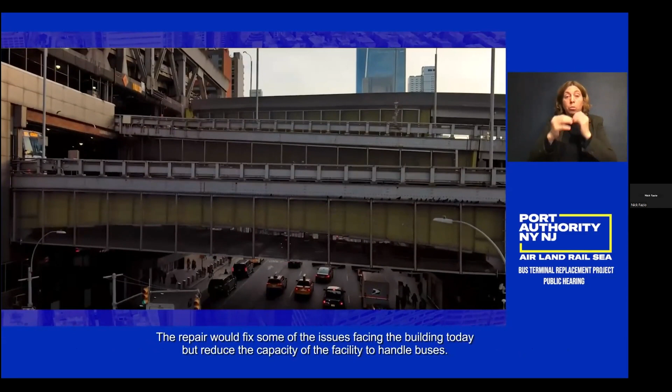The Port Authority needs to support the projected growth of commuter and intercity travel crossing the Hudson, and address the functional and physical obsolescence of the existing terminal. The existing bus terminal is already at capacity and will not be able to meet future demand. It is also past the end of its useful life and will require significant structural repair if a replacement project is not undertaken. The repair would fix some of the issues facing the building today, but reduce the capacity of the facility to handle buses. The Port Authority needs to address bus operations and storage and staging.

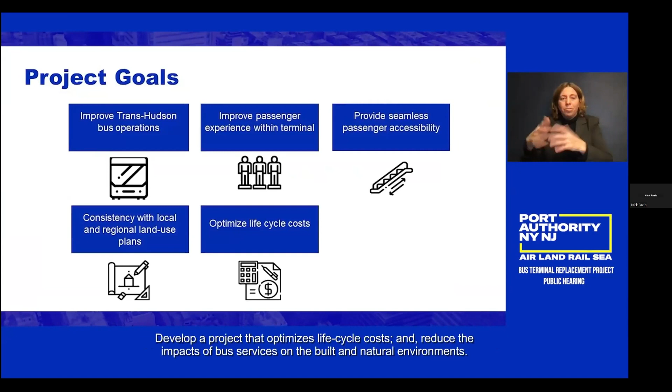Project goals: the project seeks to improve Trans-Hudson bus operations, improve the passenger experience within the terminal, provide seamless passenger accessibility to NYC transit connections, strive to achieve consistency with local and regional land use plans and initiatives, develop a project that optimizes life cycle costs, and reduce the impacts of bus services on the built and natural environments.

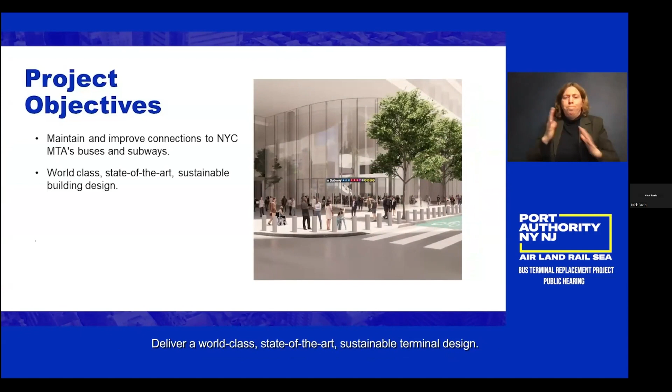Project objectives: an important guiding principle driving this project is the enhancement of the commuter experience within the bus terminal. This principle has shaped the following project objectives: maintain and enhance connectivity with subways and mass transit, deliver a world-class, state-of-the-art, sustainable terminal design, preserve and improve pedestrian and ADA accessibility to traveler origins and destinations, and establish direct bus linkages to the Lincoln Tunnel.

There is more detailed information about the project purpose and need, its goals and objectives in the Draft Environmental Impact Statement Reports, Chapters 1 and 2.

Community feedback: in this section, we will review the extensive community engagement conducted to date.

In May 2019, the Port Authority released a planning-level scoping document for public review that commenced a 120-day comment period. The document identified a long list of alternatives that were screened down to three alternatives that best met the project purpose and need: split operations between a rehabilitated bus terminal and the Javits Center, locate operations entirely at the Javits Center, or retain operations at the existing bus terminal site and Port Authority properties.

The planning-level draft scoping document, summary of comments and responses, and final scoping report summarizing this process and outcome are all available on the project website, www.PABTreplacement.com. In June 2021, a notice of intent to prepare an environmental impact statement was released to the public, initiating a 45-day comment period to solicit feedback on the NEPA Scoping Information Packet.

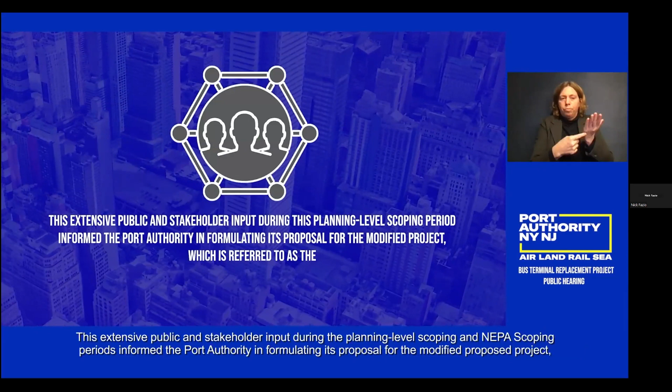Following this period, the final NEPA scoping information packet was published summarizing comments received. This extensive public and stakeholder input during the planning level scoping and NEPA scoping periods informed the Port Authority in formulating its proposal for the modified proposed project, referred to as the Bus Terminal Replacement Project.

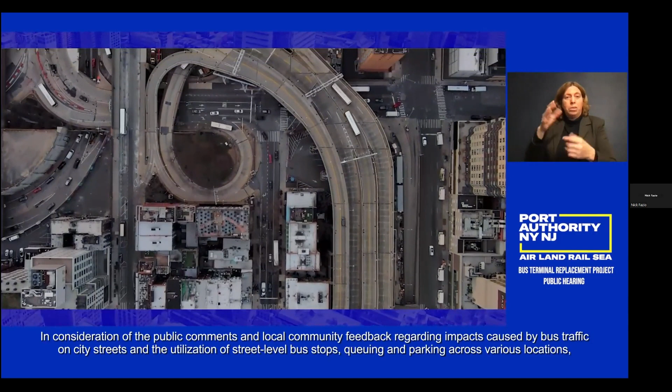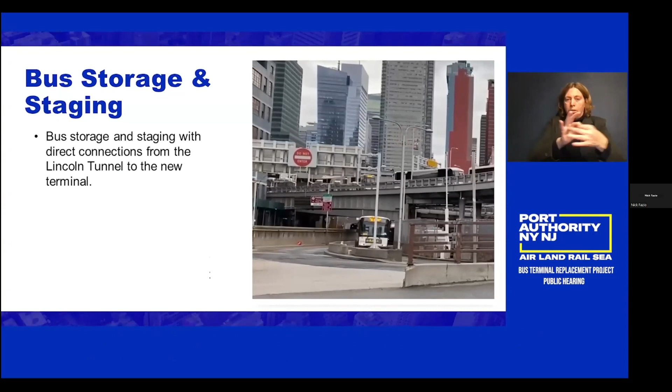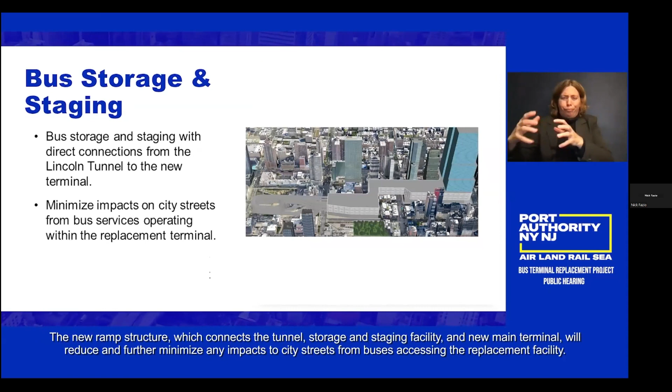Bus storage and staging: in consideration of public comments and local community feedback regarding impacts caused by bus traffic on city streets and the utilization of street-level bus stops, queuing and parking across various locations, the Port Authority responded by incorporating a bus storage and staging facility that will facilitate direct connections between the Lincoln Tunnel and the new terminal. The new ramp structure, connecting the tunnel, storage and staging facility, and new main terminal, will reduce and further minimize any impacts to city streets from buses accessing the replacement facility.

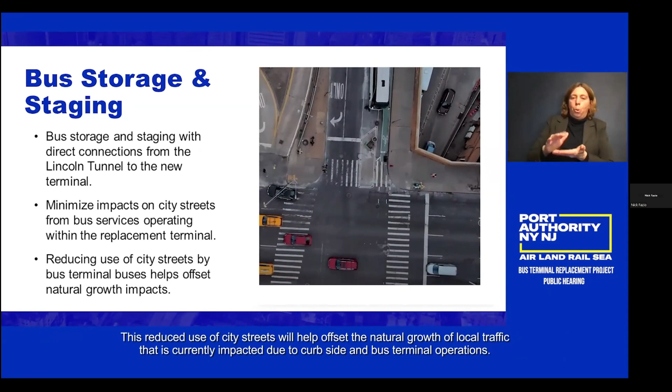This reduced use of city streets will help offset the natural growth of local traffic that is currently impacted due to curbside and bus terminal operations.

Additionally, during the planning level scoping process, the community requested that the Port Authority relocate the intercity buses presently operating at adjacent curbside locations into the scope of the project. Unlike a transit bus service, which has frequent stops within a city, an intercity bus service generally has a single stop in a city and travels long distances to reach other cities. Presently, some intercity bus services operate within the existing terminal, while others operate curbside along city streets.

In response to the public comments regarding curbside operations, a dedicated floor within the new main terminal will now facilitate the efficient functioning of curbside operations.

Project overview and site plans: in this next section, we share renderings of each project component.

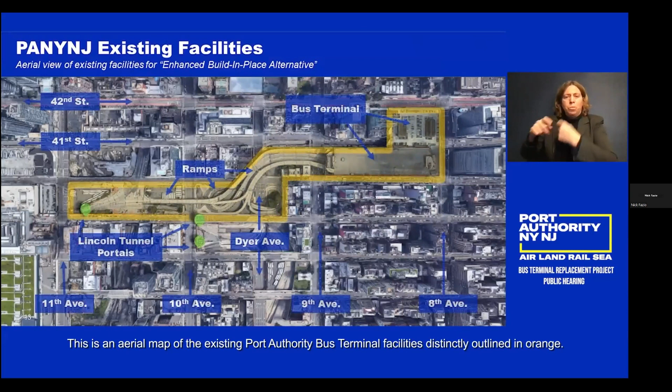This is an aerial map of the existing Port Authority bus terminal facilities, distinctly outlined in orange. The facilities extend from 8th Avenue to 11th Avenue between 39th Street and 42nd Street.

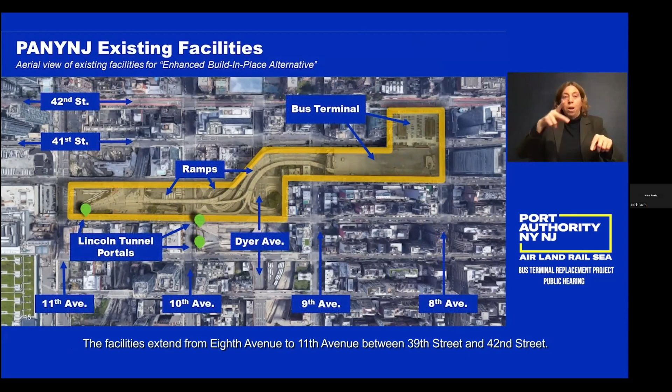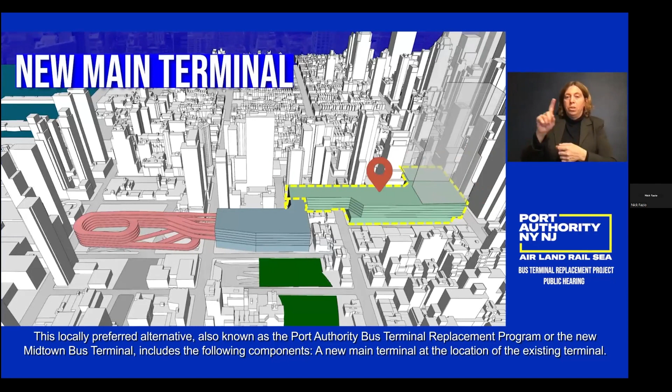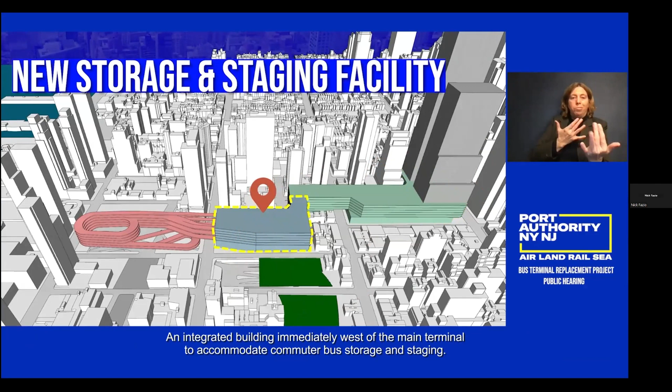This locally preferred alternative, also known as the Port Authority Bus Terminal Replacement Program, or the New Midtown Bus Terminal, includes the following components: a new main terminal at the location of the existing terminal, utilization of Port Authority property, an integrated building immediately west of the main terminal to accommodate commuter bus storage and staging, a new ramp structure and underpass to connect directly the buildings and the Lincoln Tunnel, publicly accessible open space, and private development at 2 locations on Port Authority property.

Now we will walk through each major component of the proposed project.

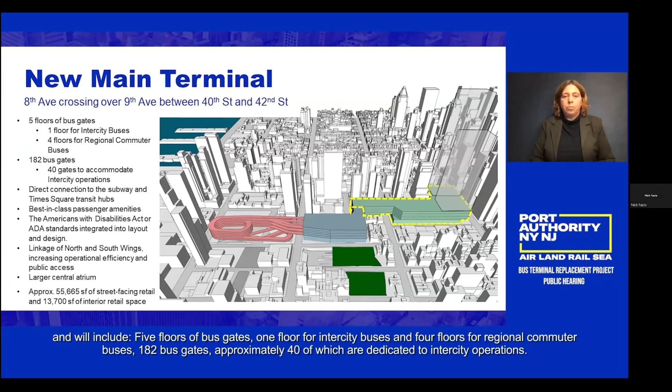The main terminal will be located at 8th Avenue crossing over 9th Avenue between 40th Street and 42nd Street, and will include 5 floors of bus gates, 1 floor for intercity buses, and 4 floors for regional commuter buses. There will be 182 bus gates, approximately 40 of which are dedicated to intercity operations, with direct connection to the 8th Avenue subway and Times Square transit hubs, plus best-in-class passenger amenities such as modern facilities, appealing street-facing retail spaces, modernized ticketing areas, and state-of-the-art design.

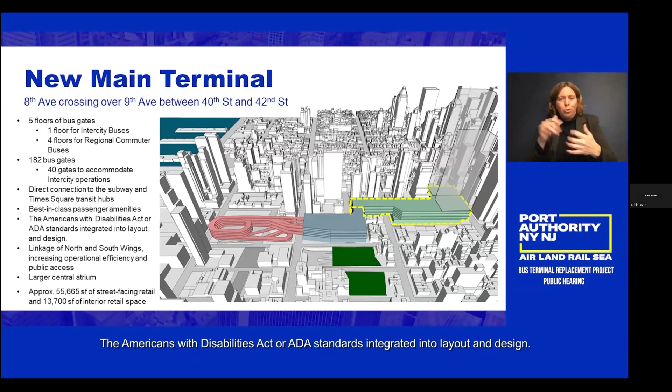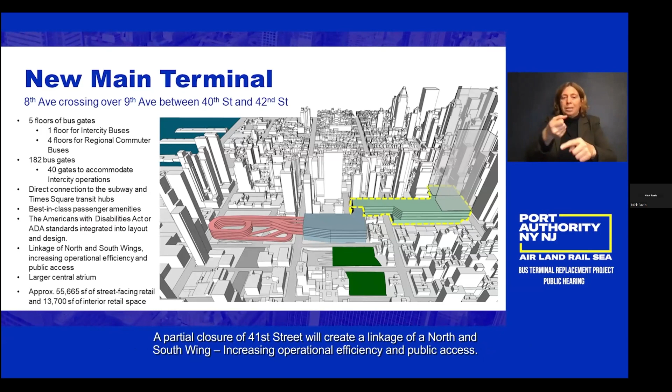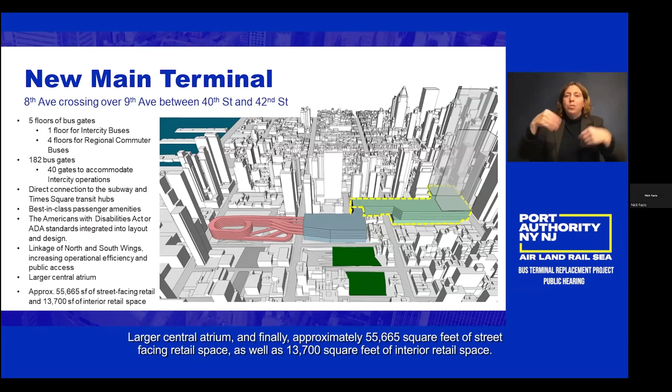The Americans with Disabilities Act, or ADA standards, will be integrated into the layout and design. A partial closure of 41st Street will create a linkage of a north and south wing, increasing operational efficiency and public access, with a larger central atrium, and finally approximately 55,665 square feet of street-facing retail space, as well as 13,700 square feet of interior retail space.

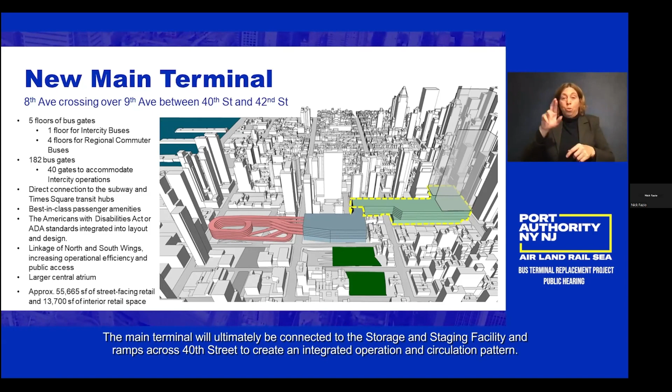The main terminal will ultimately be connected to the storage and staging facility and ramps across 40th Street to create an integrated operation and circulation pattern.

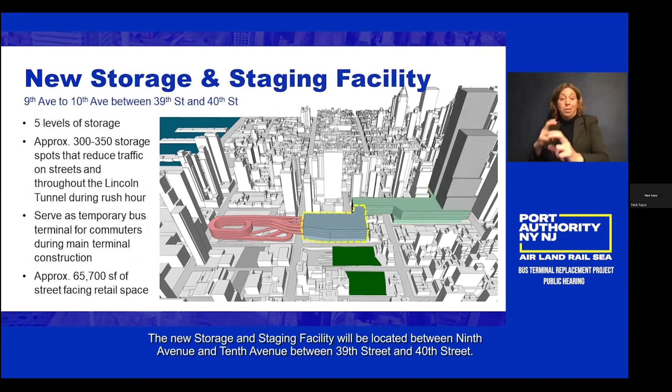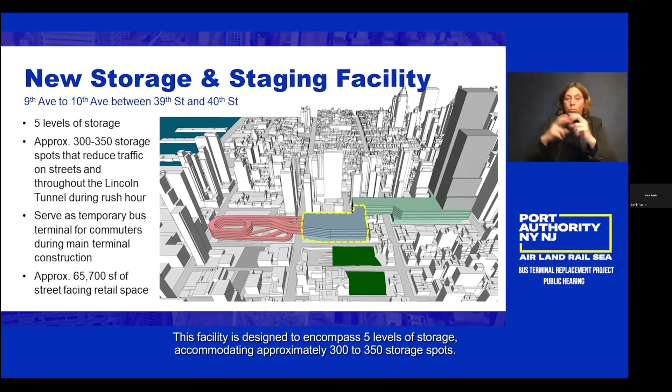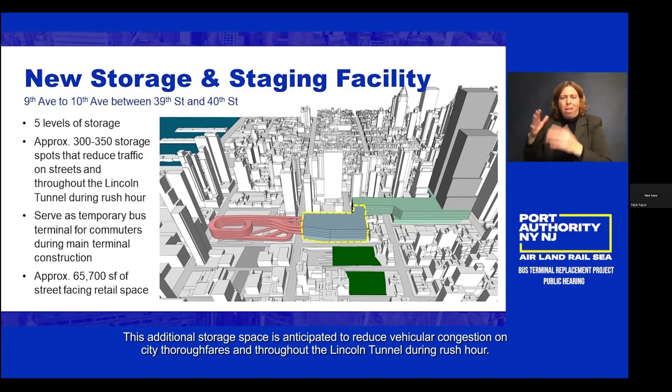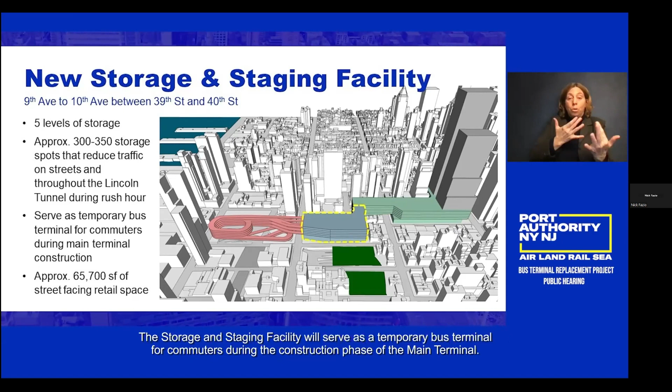The new storage and staging facility will be located between 9th Avenue and 10th Avenue, between 39th Street and 40th Street. This facility is designed to encompass 5 levels of storage, accommodating approximately 300 to 350 storage spots. This additional storage space is anticipated to reduce vehicular congestion on city thoroughfares and throughout the Lincoln Tunnel during rush hour. The storage and staging facility will serve as a temporary bus terminal for commuters during the construction phase of the main terminal. Additionally, the facility will provide approximately 65,700 square feet of additional at-grade retail space.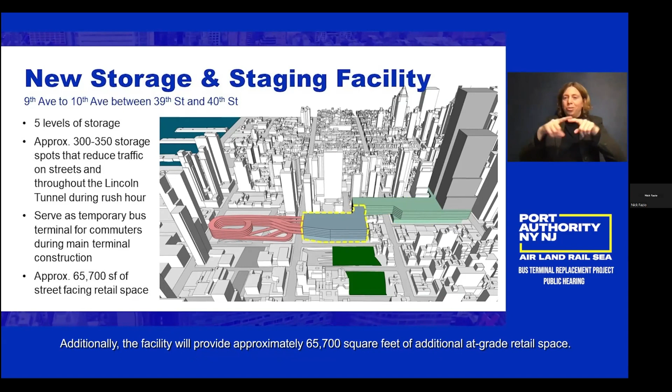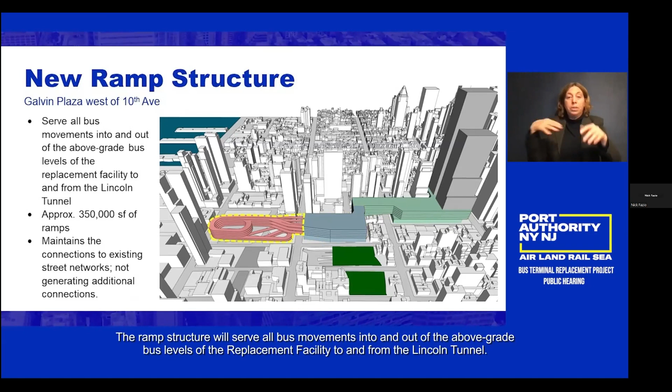The new ramp structure will be located at Galvin Plaza, west of 10th Avenue. The ramp structure will serve all bus movements into and out of the above-grade bus levels of the replacement facility to and from the Lincoln Tunnel. Spanning an area of approximately 350,000 square feet, the ramp structure will connect to the storage and staging facility and main terminal.

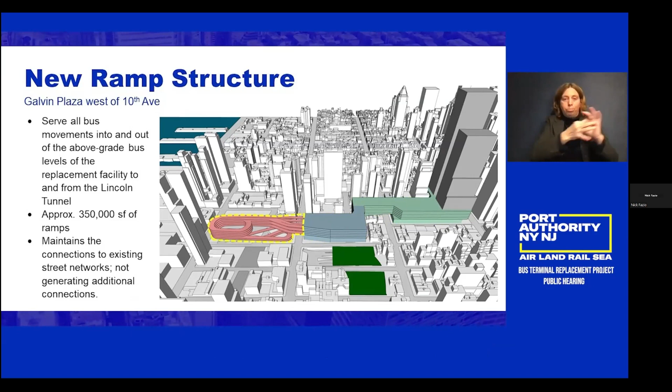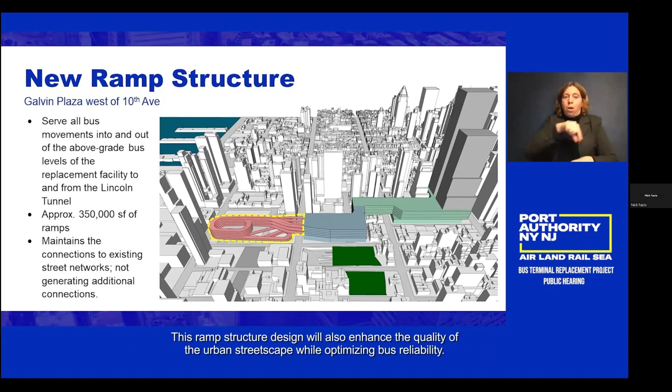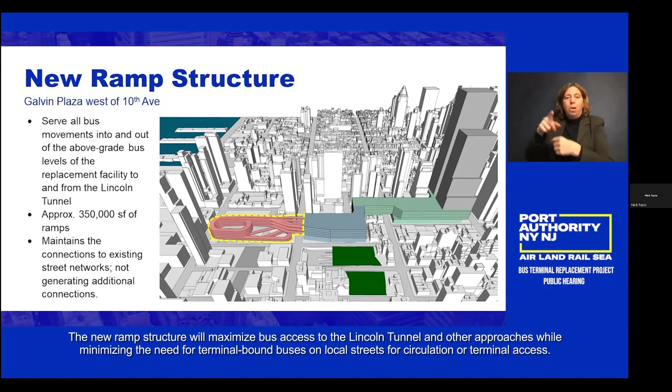The design of the ramps will greatly relieve congestion on 40th Street and 9th Avenue. This ramp structure design will also enhance the quality of the urban streetscape while optimizing bus reliability. The new ramp structure will maximize bus access to the Lincoln Tunnel and other approaches while minimizing the need for terminal-bound buses on local streets for circulation or terminal access.

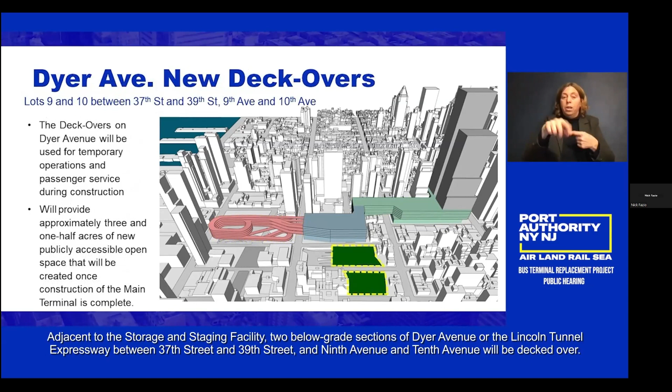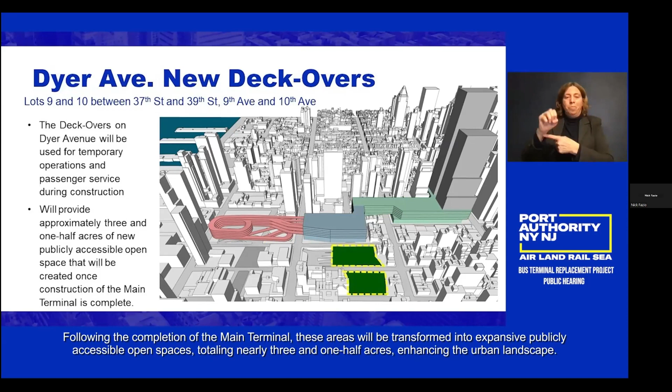Adjacent to the storage staging facility, two below-grade sections of Dyer Avenue, or the Lincoln Tunnel Expressway, between 37th Street and 39th Street, and 9th Avenue and 10th Avenue, will be decked over. The deckovers on Dyer Avenue will serve as a location for temporary bus operations and potentially for construction staging during the development phase of the replacement terminal. Following the completion of the main terminal, these areas will be transformed into expansive, publicly accessible open spaces, totaling nearly 3½ acres, enhancing the urban landscape.

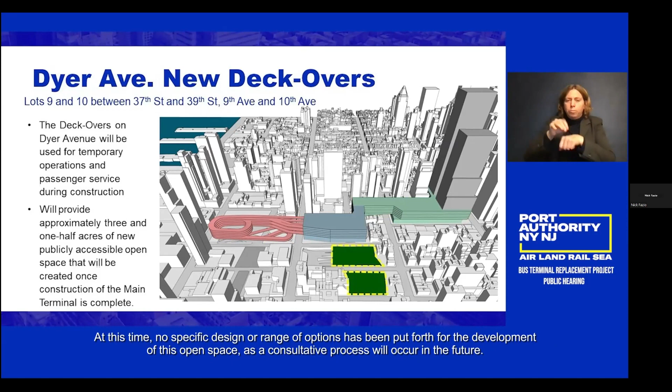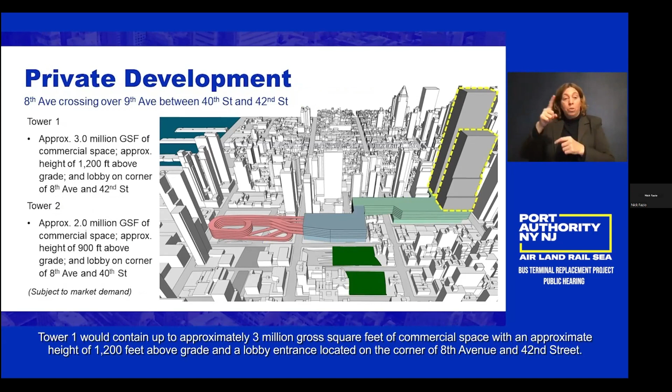As part of the project, two private development towers are proposed to be built on Port Authority property located on 8th Avenue between 40th Street and 42nd Street. The two towers are proposed as commercial offices. Tower 1 would contain up to approximately 3 million gross square feet of commercial space with an approximate height of 1,200 feet above grade and a lobby entrance located on the corner of 8th Avenue and 42nd Street.

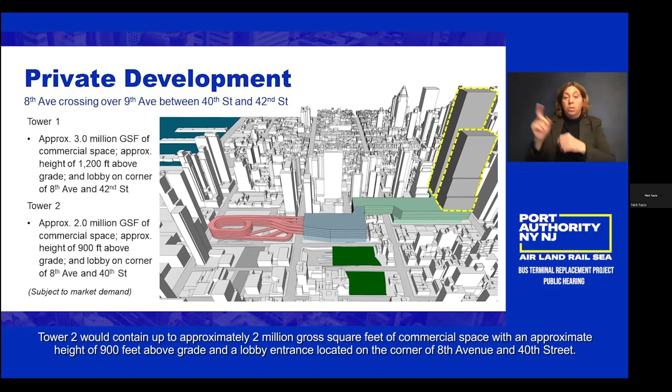Tower 2 would contain up to approximately 2 million gross square feet of commercial space, with an approximate height of 900 feet above grade and a lobby entrance located on the corner of 8th Avenue and 40th Street. These approximations are subject to market demand. The funding strategy for the project would include financing from this private development and payment in lieu of taxes.

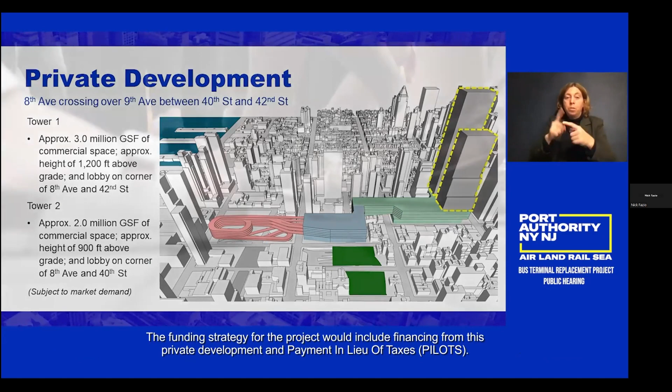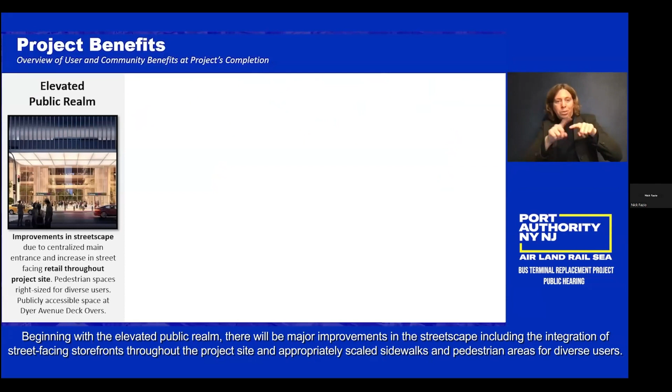Upon completion, the Port Authority Bus Terminal will provide many advantages to its diverse customers, community members, and various stakeholders, including an elevated public realm, significantly enhanced user experience, improved vehicular and pedestrian flow, and green energy transition, to name a few. Beginning with the elevated public realm, there will be major improvements in the streetscape, including the integration of street-facing storefronts throughout the project site and appropriately scaled sidewalks and pedestrian areas for diverse users. The conversion of the Dyer Avenue deckovers into publicly accessible space will further augment these improvements to the public realm.

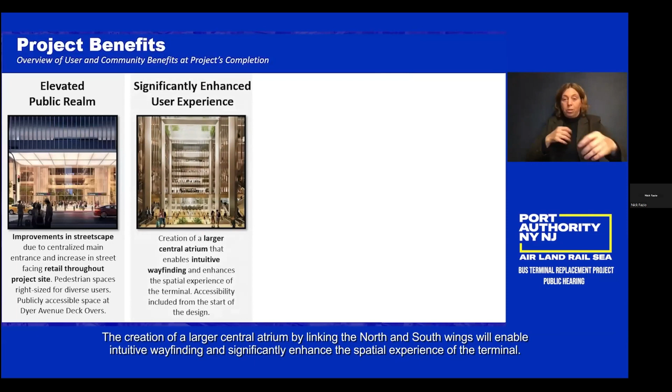The creation of a larger central atrium by linking the north and south wings will enable intuitive wayfinding and significantly enhance the spatial experience of the terminal.

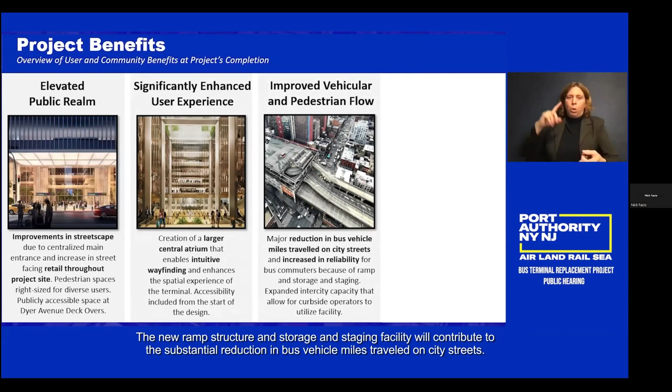The new ramp structure and storage and staging facility will contribute to a substantial reduction in bus vehicle miles traveled on city streets. This streamlined traffic flow will enhance the reliability of bus commutes, benefiting commuters. Moreover, the expanded intercity capacity will accommodate curbside operators using the facility.

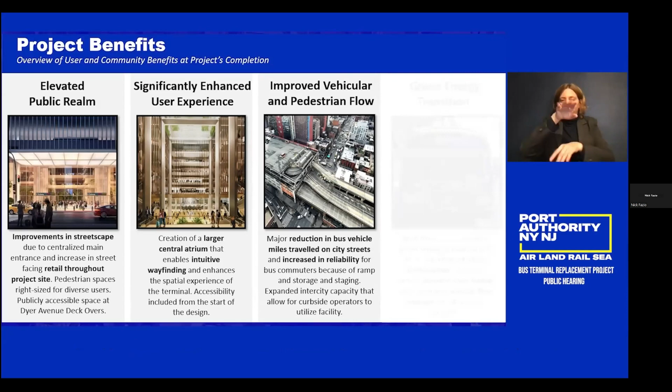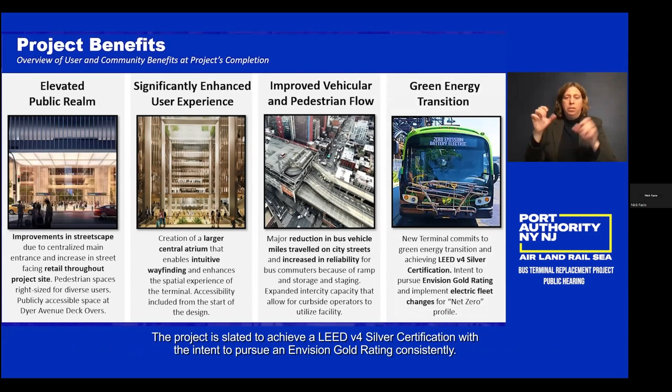Lastly, the new terminal will embrace a green energy transition. The project is slated to achieve a LEED Silver certification, with the intent to pursue an Envision Gold rating. This aligns with the adoption of electric fleet changes and the incorporation of modern energy-efficient systems within the terminal, striving towards a net zero carbon profile.

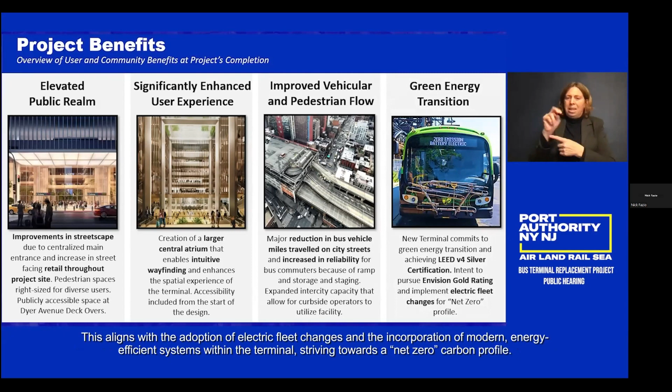In this next section, we will provide an overview of the project phasing as well as the construction process.

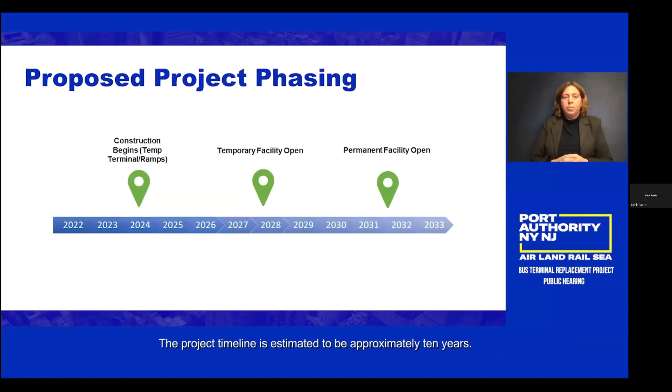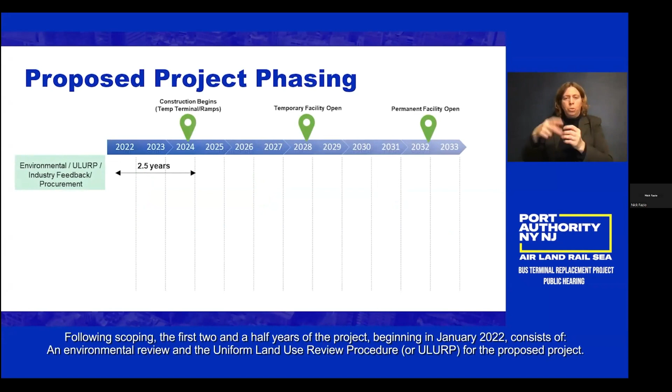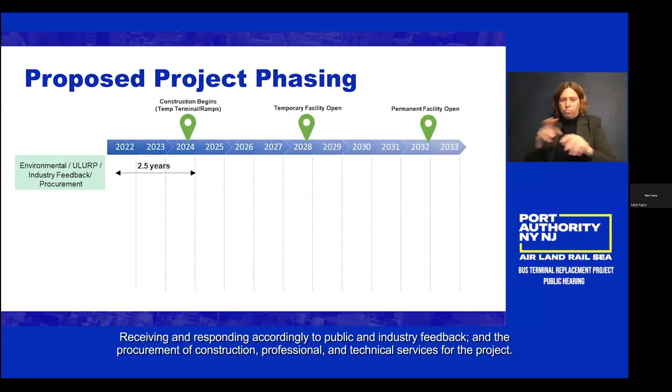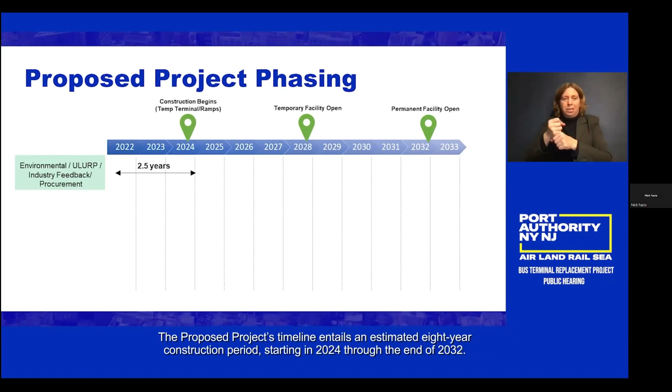The project timeline is estimated to be approximately 10 years. Following scoping, the first 2.5 years of the project, beginning in January 2022, consist of an environmental review and the Uniform Land Use Review Procedure, or ULURP, for the proposed project, including receiving and responding to public and industry feedback, and the procurement of construction, professional, and technical services for the project.

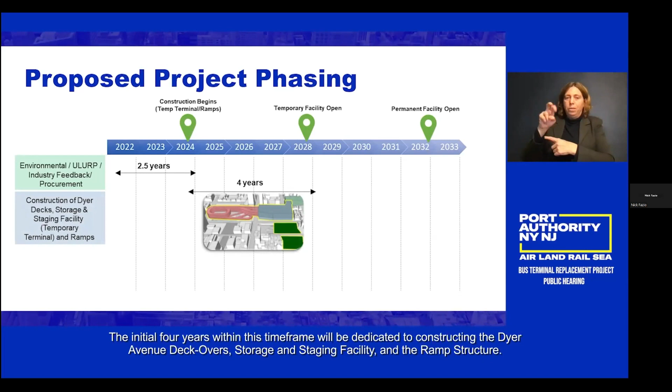The proposed project's timeline entails an estimated 8-year construction period, starting in 2024 through the end of 2032. The initial 4 years will be dedicated to constructing the Dyer Avenue deckovers, storage and staging facility, and the ramp structure. The storage and staging facility will open and serve as the temporary terminal by approximately late 2028, at which time construction of the main terminal will begin for a duration of 4 years.

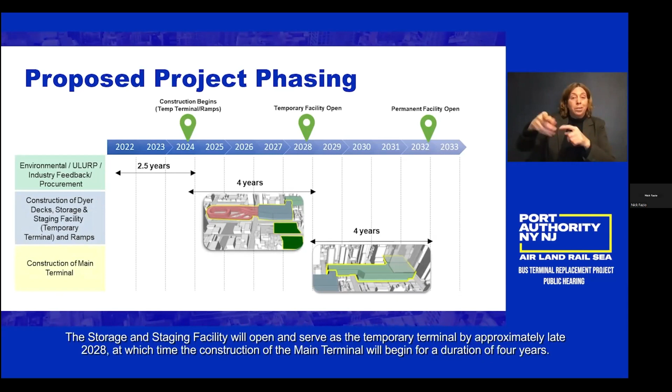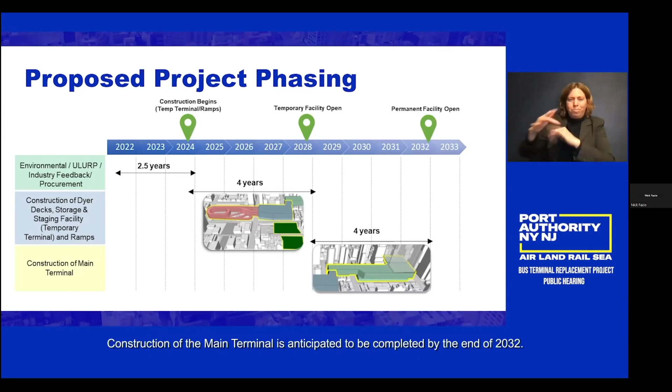Construction of the main terminal will incorporate foundational work for the private development set to occur independently in the future. The main terminal is anticipated to be completed by the end of 2032. The private development will occur after and is expected to be completed by 2040.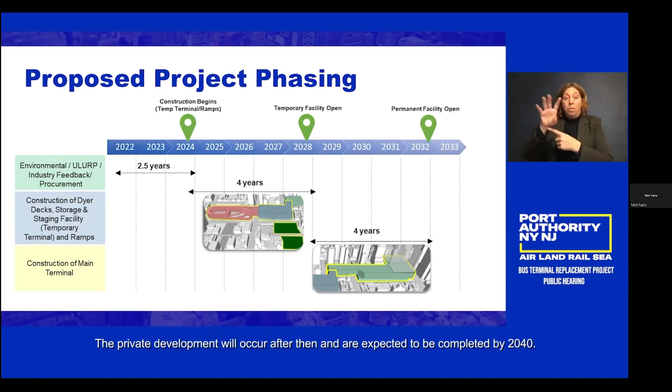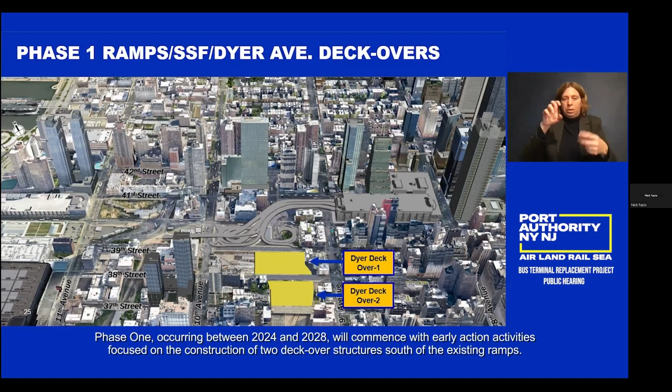The following renderings depict the 8-year construction period organized into 2 major phases. Phase 1, occurring between 2024 and 2028, will commence with early action activities focused on the construction of 2 deck-over structures south of the existing ramps. These deckovers will be placed over the mouth of the south and center tubes of the Lincoln Tunnel.

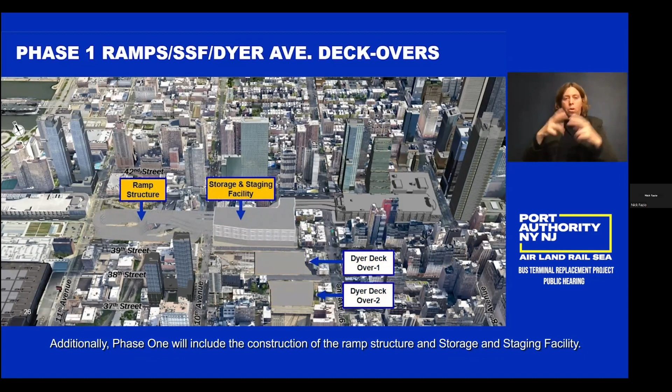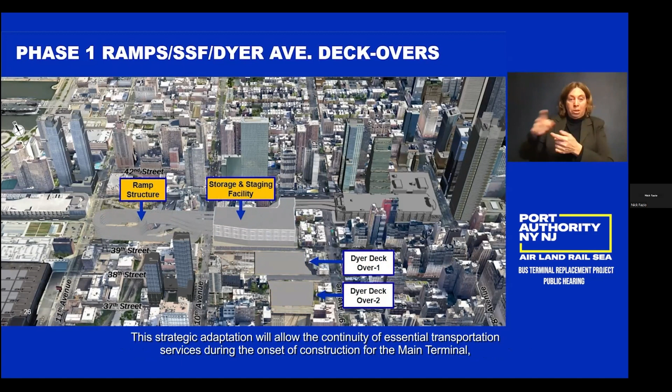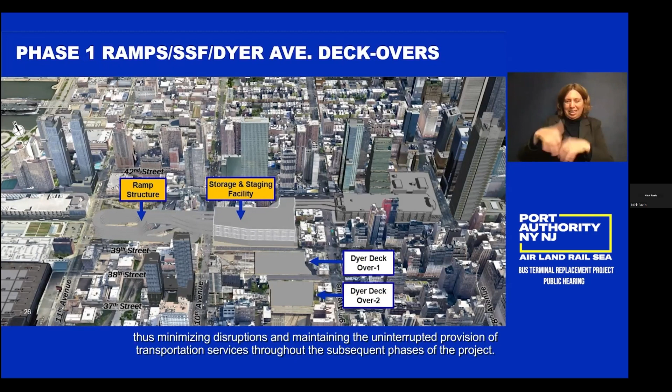Additionally, Phase 1 will include construction of the ramp structure and storage and staging facility. The storage and staging facility will be equipped to operate as a temporary terminal when construction of the main terminal begins. This strategic adaptation will allow continuity of essential transportation services during the onset of construction, minimizing disruptions and maintaining uninterrupted transportation services throughout the subsequent phases of the project.

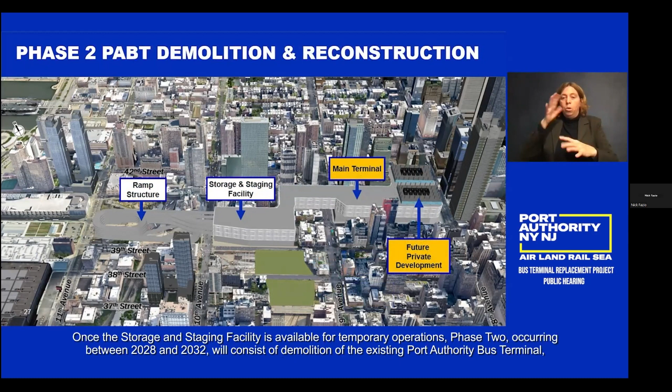Once the storage and staging facility is available for temporary operations, Phase 2, occurring between 2028 and 2032, will consist of demolition of the existing Port Authority bus terminal, construction of the new main terminal, as well as the foundational work of 2 private development towers.

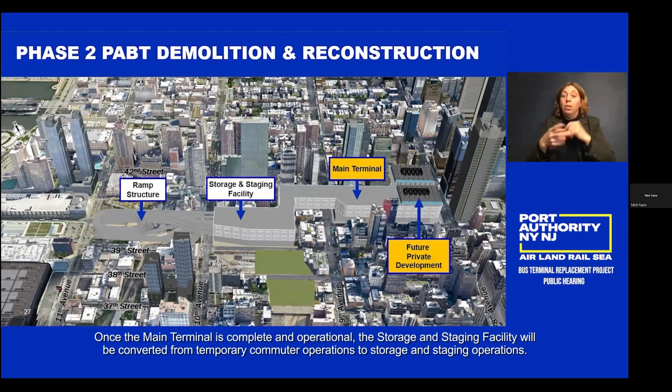Once the main terminal is complete and operational, the storage and staging facility will be converted from temporary commuter operations to storage and staging operations. The Dyer Avenue deckovers can then be converted to public open space, with the foundation and cores of 2 private towers incorporated in the design and construction of the new bus terminal.

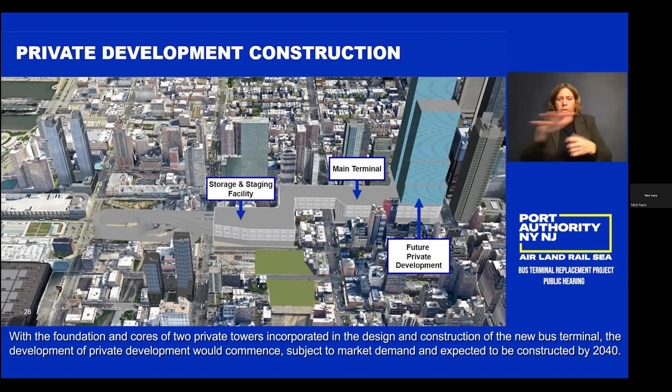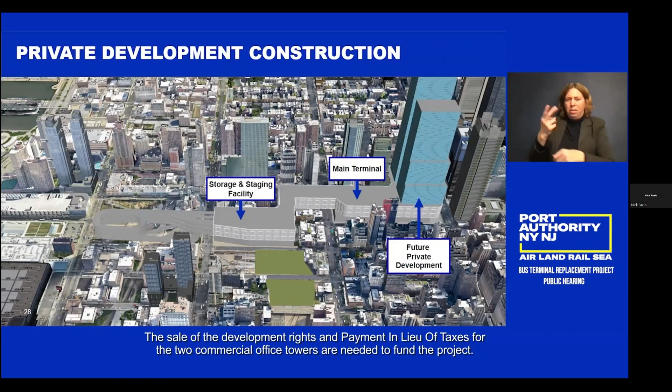The development of private towers would commence subject to market demand and is expected to be constructed by 2040. The sale of development rights and payment in lieu of taxes for the 2 commercial office towers are needed to fund the project.

In this next section, we will conclude with an overview of the environmental timeline and next steps. At present, the project is positioned at Step 5 within its comprehensive planning and environmental review process.

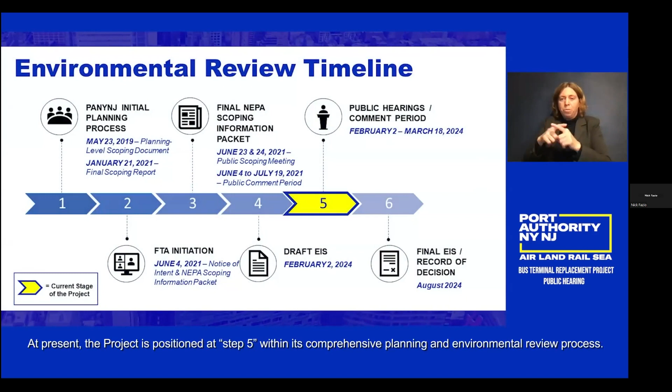The DEIS public hearings and 45-day comment period began with the publication of the DEIS. In terms of next steps, the project team will consolidate all comments received during public meetings, including those submitted via the project website, email, mail, and voicemail.

Then the project will progress to Step 6, in which the team will prepare and release a Final Environmental Impact Statement and the Record of Decision by the summer of 2024.